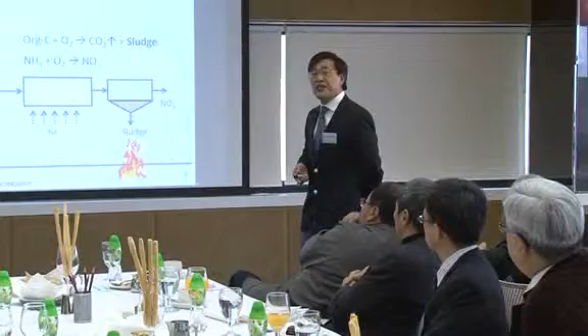Biological treatment is the main technology for large-scale industrial wastewater and domestic wastewater treatment. The technology was invented by two British engineers in 1914, using a very simple, natural way: pumping air to provide oxygen to oxidize organic pollutants, the major pollutants discharged from us, and convert organic matter into CO2, completing the natural cycle. It's a good idea.

But the problem is that oxygen is hardly dissolving. A lot of air is pumped inside - in Cantonese, sai here - only a few percent is actually working. Most of it just goes through without making any contribution. That's the reason it's expensive.

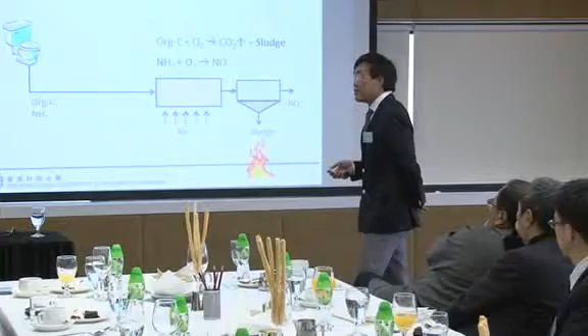Secondly, no matter what you do, this conversion can only convert 40% of carbon into CO2. The 60% remaining carbon will stay in the form of sludge. So this is not a beautiful conversion - energy intensive and half-baked. But it's a natural reaction we know.

We can do it easily everywhere, and this technology has been used everywhere, so we know the problem well.

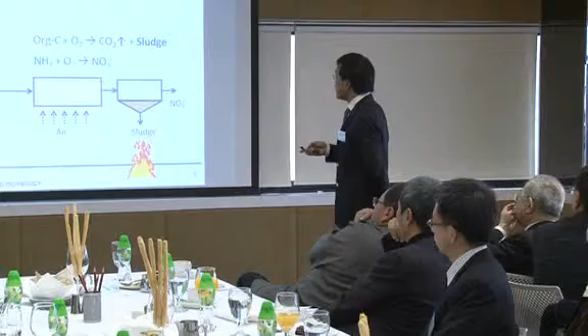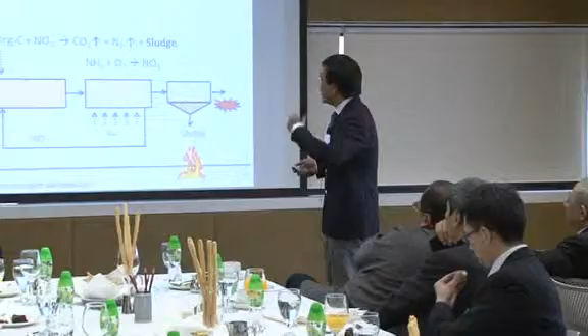Now, by 1962, a few professors invented another new addition: removal of nitrogen, because nitrogen is another major pollutant to our water bodies, causing algae blooming and excessive algae growth. So we can add this reaction, again using organic carbon, to do denitrification - converting nitrate from ammonia to nitrogen gas. Again, this is the nitrogen cycle, a natural reaction.

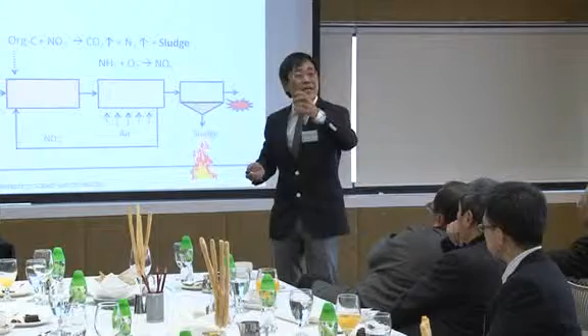This reaction cannot solve the problem because we still use oxygen, and it again produces a lot of sludge, same as the organic oxidation.

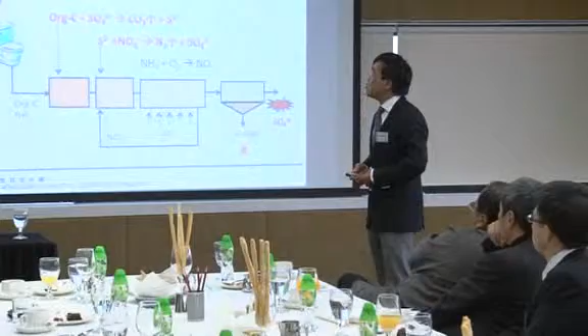And now, we invented technology because we know Hong Kong has been using seawater to flush our toilets for 50 years already, saving tremendous fresh water - 22%, saving 750,000 cubic meters of fresh water every day, much cheaper than Singapore's new water I'm sure. They are only doing a few percent; we are doing 22%. Great engineering success.

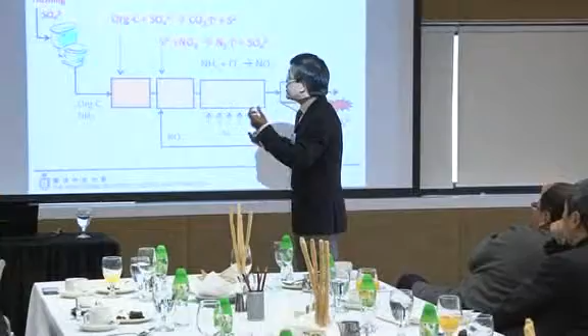Because of this practice, we realized in 2002: can we do something to fit and maximize the benefits of seawater toilet flushing, and to get green technology developed?

Now remember, the benefit of seawater toilet flushing also brings a lot of sulfate into our sewage, causing problems - we know, smelling problems. This is the bad side. We want to turn the bad side into the good side.

Now, the idea is that sulfate can convert organic carbon into CO2 very efficiently. That's the reason we have smelling problems everywhere in the sewer. This knowledge has been with us for many years - of course, you'll tell me, my mother already knows this.

Anything new? The new thing here is that we can convert this sulfate into CO2 without producing H2S. No smelling - so the beauty is here. I'll show you later why. And that's something a lot of people forgot.

So when we were searching the patents, there were a lot of patents, but none of them hooked up to seawater toilet flushing resultant sewage, saline sewage, salty sewage. The product from this reaction can then be utilized for denitrification, to convert nitrate to nitrogen gas. So we are completing the carbon cycle and nitrogen cycle here without being bothered by oxygen.

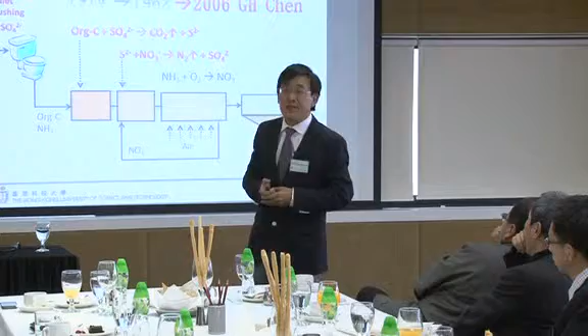I was told that 100 Chinese news websites reported on HKUST SANI Technology. It's good PR for HKUST - I'm sure our president will be very happy.

This technology will redesign 100 years of treatment technology because the concept has changed. The concept changes from the 2-cycle idea used for 100 years into 3 cycles. Scientifically, it's new that we're adding this cycle. So everything changes from 2 dimensions into 3 dimensions, from oxygen here into these 3 cycles.

So we're linking this - all the reactions are natural reactions. We don't need to use any special bacteria; they are all natural bacteria, natural biomass. However, what we do is introduce new reactions to realize something new in the practice of wastewater treatment. So this technology, with the long name sulfate reduction, autotrophic denitrification, nitrification integrated process, is shortened to SANI. And since it happens to match the Chinese name for killing sludge, we were very lucky.

What we can do in terms of application technology depends on the concept. Once the concept is okay, we can develop it into a working system, which has 3 reactors. Number 1 is a sulfate-based organic conversion under anaerobic conditions, no oxygen.

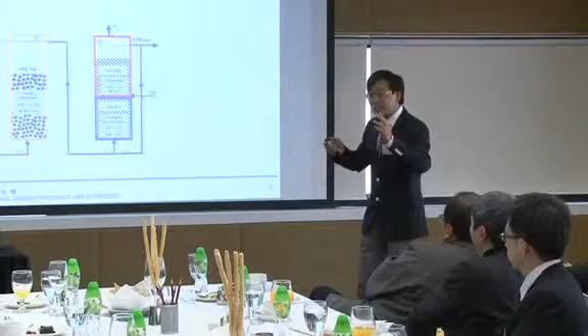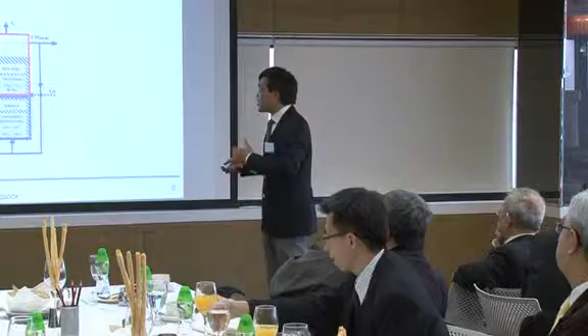We use UASB, a sludge upflow bed, a quite common treatment method. After that we produce sulfide, which is utilized in reduction of nitrate into nitrogen gas. So the concept is sulfate from the beginning to sulfate again. If you worry about any problem, there's no problem, because sulfate is already with us.

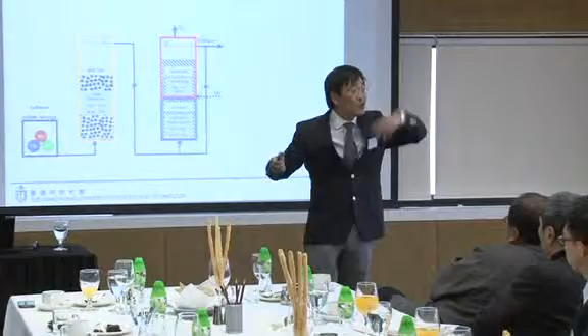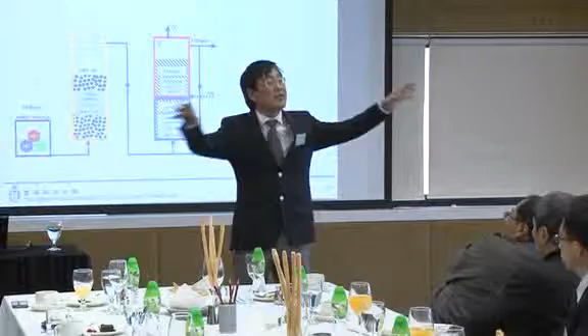We just turn it around. We don't produce any harmful byproducts, and at the same time we don't have sludge. We're discharging our treated wastewater into the ocean - no problem, because it's a natural cycle. We have a lot of sulfate in the ocean. If you discharge it into a freshwater body, then you should watch the concentration of sulfate. But in toilet flushing areas, no problem - it's a natural cycle.

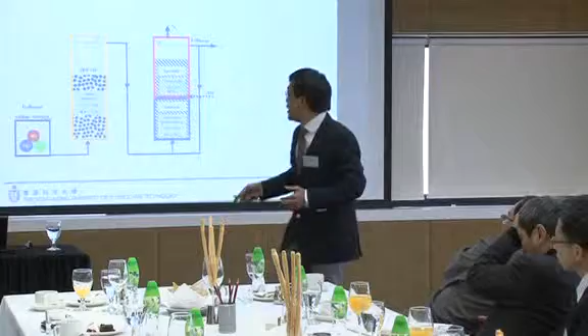You don't need to jump up and say, oh, is there a problem? No, no problem. This technology, after we tried it for 3 years at lab scale, we convinced the DSD to give us money. They let us try it at Tung Chung pumping station for 2 years, a very steady state operation, for 205 days.

With real wastewater, no sedimentation tank anymore - I just used 3 simple tower-type reactors. The result proved the concept is correct: we can remove almost 90% of organic pollutants, a quite large percentage, and 80% of nitrogen, while the effluent water is pretty clean, meeting the discharge standard. The EPD was very happy, and even now it's happy.

More importantly, we don't have any sludge discharged over 2 years. Every day we pump in 10 cubic meters. So you can see material never disappears, for sure. Where is the fate of those non-biodegradable solids?

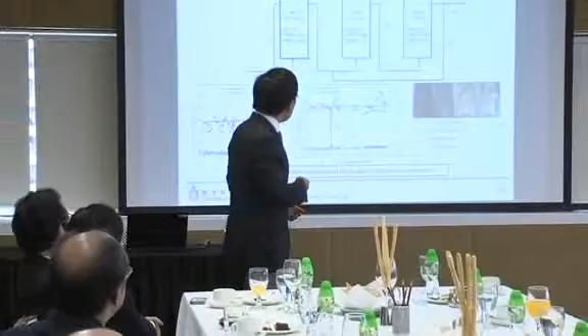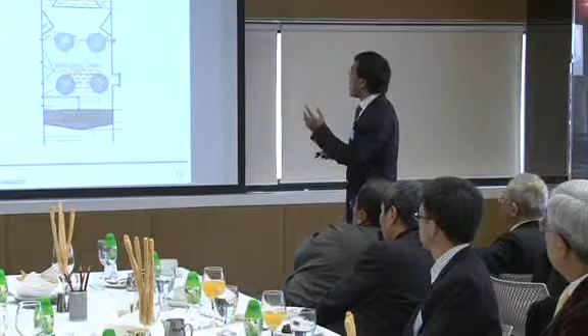To answer that question, we carry out balance analysis of the solids, dividing them into biodegradable and non-biodegradable, everything covered. The analysis tells us that about 15% may be out, most of them decompose again, and finally those sands, about 80% sands, stay at the bottom of the reactor for sure. They never disappear - I'm not a magic guy, I'm not a magician, okay?

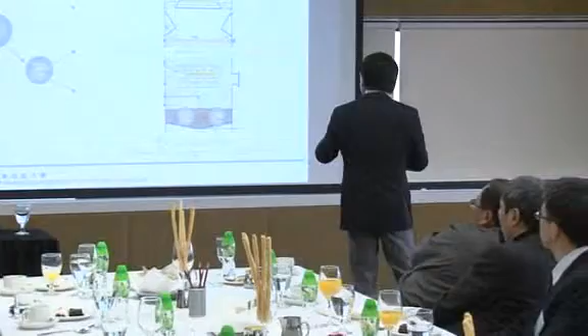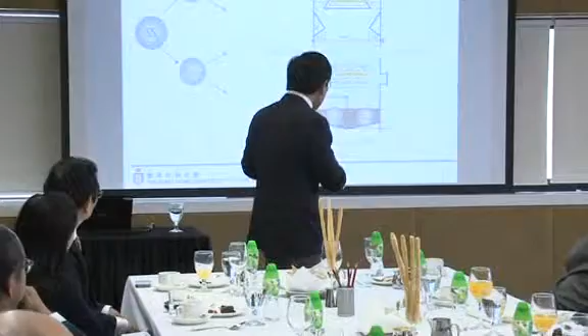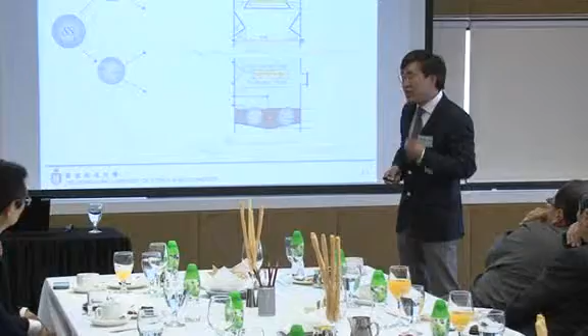But I can tell you that every day this process produces only 0.63 kilo SS per day, only 2-3% of normal technology. So we can take everything out, measure the sludge quantity, and verify the calculation - it's a perfect match with the analysis. So clearly we can show you and convince you that this process technology produces very little sludge.

Why? Then we can go further. As scientists, we need to write papers to convince other scientists. Why? Because we can show you the reactions. Compared with conventional organic matter treatment - treating 100 grams of organic matter produces 42 grams of sludge conventionally - why does this reaction produce only 1.9 grams of sludge? Nothing, all right?

And interestingly, this reaction produces a lot of alkalinity, moving the pH very high. This is important - because the pH is high, it makes the H2S produced from the reaction dissolve in water 100%. You don't feel the smell. Otherwise this technology would be nothing new, no beauty.

The beauty is that when we do this, we have sufficient sulfate because we have seawater flushing. Then we can raise the alkali concentration higher to keep the pH higher, so we can have 100% H2S dissolved in water and fully use it.

And you can see the reaction of autotrophic denitrification also produces little sludge. Compared with conventional, which is talking about 24 something, you can compare that all the reactions are 'slim guys', not heavy producers of sludge. Where can sludge be produced? No.

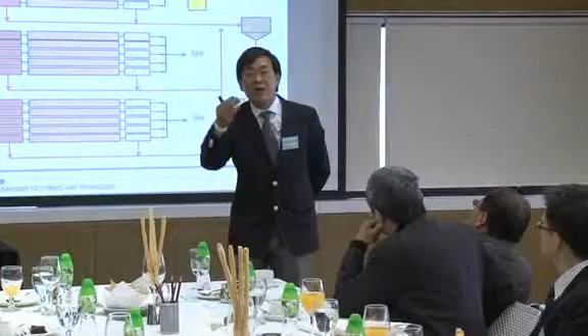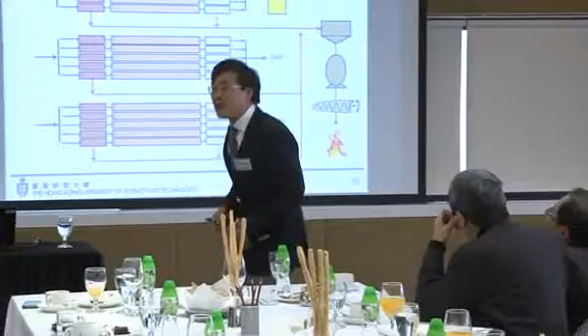Now how about talking to the Japanese about this technology? Because Japan will not use seawater for toilet flushing, since they're used to enjoying washing at the toilet - they use fresh water to wash their buttocks. You can't convince the Japanese to use seawater to wash their buttocks, impossible. So what do the Japanese do? Even the Taiwanese, in every coastal city, refuse seawater toilet flushing.

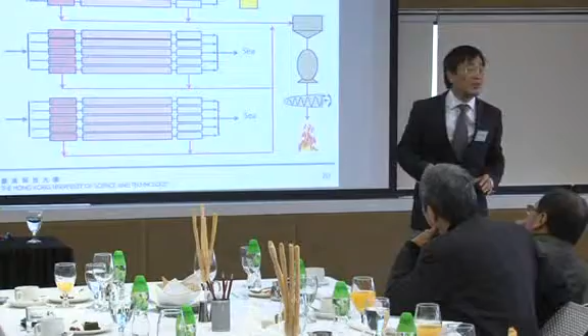Let's do it this way. Fortunately, most treatment plants are built on the coastline for easy discharge. That's okay. We can only use the water reuse effluent at most 30%, because we can't reuse water everywhere unless you put in RO, which is very expensive. So we only have a third of effluent that can be reused for irrigation, landscaping, car washing, street washing, and we can turn this into an idea.

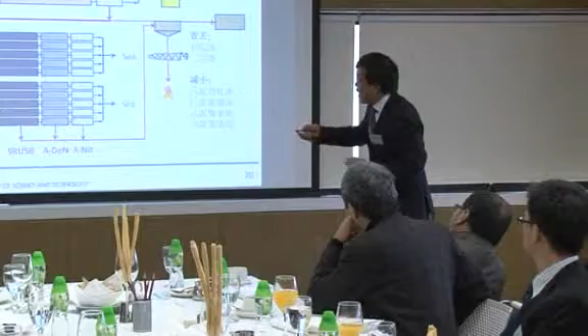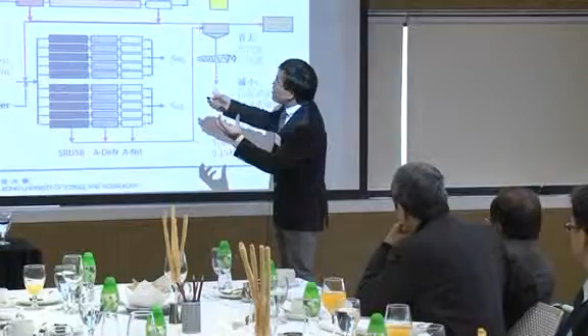Let's do it this way: we remain the 30% as it is, don't change it, and pump the other two-thirds of seawater from the coastline into the treatment plant. The cost is nothing, over ten kilos we calculate, just for abstraction and sending seawater into the plant. Turn the treatment plant into SANI, and the sludge from here can be handled together. So we solve the sludge problem for existing freshwater wastewater treatment plants without being bothered by seawater toilet flushing, as long as it's located around the coastline. We can reduce 50% of energy, reduce the sludge part, eliminate the sedimentation tank - think about how much space can be saved.

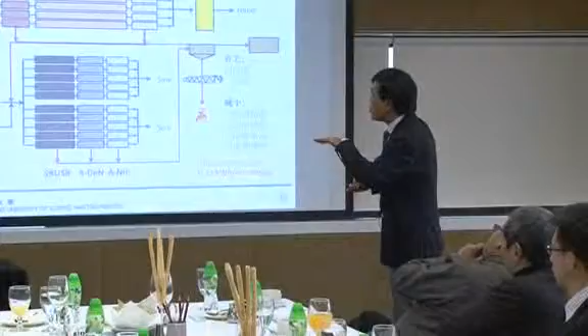So now I'll stop talking about SANI and move to another topic, though it links back to it. In the last 10 years, we also developed a fantastic technology called membrane technology, which I know Ms. Eto and many companies are also doing. In the last 15 to 20 years, this has been the most advanced technology in the world - we put the membrane into the reactor to eliminate the clarified sedimentation tank, reduce space, and solve sludge bulking trouble. We've really invented a lot of membranes.

But unfortunately, all membranes in the world get clogged. You have to take it out, or put in chemicals to wash it every 2 to 3 months. It may not be very costly, but it looks somehow tricky and troublesome, and it affects the lifespan of the membrane. We developed a technology we call low-cost membrane and no-fouling membrane - it never fouls.

This is the first Chinese technology of MBR. We have presented it already, but we will disclose the patents once we apply for the American patent, so you will get to know what it is, for sure. This technology can be applied not only for airports but everywhere, maybe even in Saigon, I don't know. The beauty is that this technology has 100 times higher permeate flux.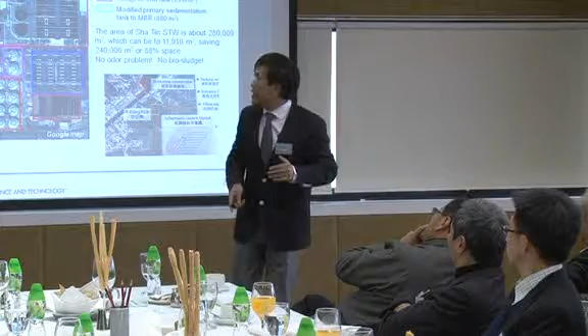Hopefully this process we give a special name called MOST. This is the ultimate version of our MBR. MOST doesn't mean Ministry of Science and Technology—okay, it's only this one.

And here is the history of our technology, starting from trying everywhere—I think I mentioned no time. Okay, then the last one, we're taking a SANI technology. The SANI technology, it is that—maybe I'll go through this one—seawater toilet flushing.

And because of seawater toilet flushing, we can think of new ideas, whether we can recover phosphorus. Phosphorus will be diminishing in the next 50 years. Phosphorus means the 5th element of life. No phosphorus, no life. It's simply as important as rare earth metals in the next 50 years.

How much is the cost? The cost is, okay, now. So how can we do it? We can recover the phosphorus from urine, because urine contains a lot of phosphorus. Usually what we can do is put in those kinds of chemicals into human urine, then produce a phosphate fertilizer called struvite.

This is nothing new, but the new thing is that we can put in seawater—we don't need the chemicals. Why? Because seawater contains a lot of magnesium, a lot of alkali God gave us. So we can do this, and then we can do separation of urine from the toilet.

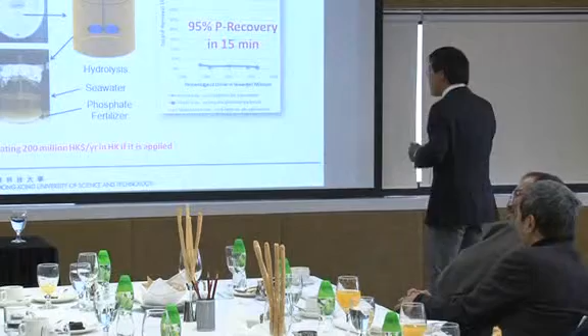Not only passive—business is here. Because every year, the price increase of phosphorus is higher than gold. You don't buy gold, we buy the future of phosphorus. Okay, remember, phosphorus will disappear, there's no way around it.

And how much money can we bring to Hong Kong if we apply this? We can produce, at the moment, 200 million Hong Kong dollars per year.

Wastewater is a resource, it's nothing else. And let's go much wider—what is the future of Hong Kong? A smart water system for the future of coastal cities—Hong Kong Airport is doing excellent work.

They developed a 3-water system: fresh water, seawater, and clear water. We can put these together, turn it around, and save 50% of water resources—much higher than the 20% from seawater alone.

This technology can combine with the SANI technology. Finally, we can use SANI, so we can solve a lot of problems. This technology, I no longer call it green—I call it blue water technology, because we use seawater. This HKUST blue water technology can save the earth. We can save so much water, so much electricity, and recover so much phosphorus.

And I take this opportunity to acknowledge my major collaborators in Holland, in South Africa, and all my teams.

And finally, let me summarize what all this has told us. A one-water system, burning sludge, thinking humans want to conquer nature—that is bullshit. A three-water system, SANI technology, following nature—that is the highway to success. Thank you very much.